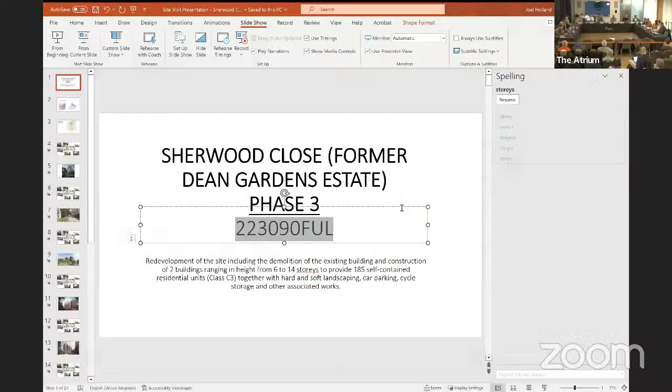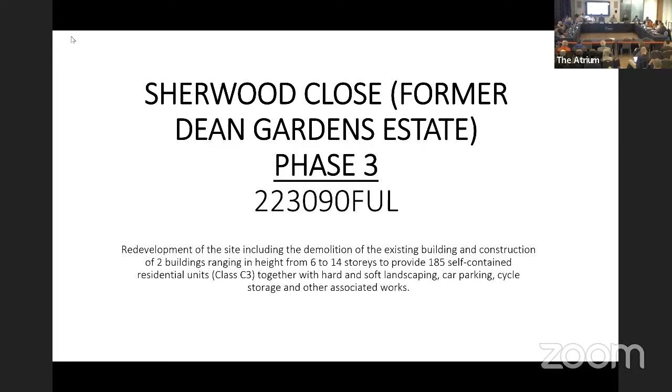Good evening, members. Item number 2 on the agenda this evening is an application for full planning permission pertaining to phase 3 of the Dean Gardens Estate redevelopment. The originally consented redevelopment of the estate consisted of 3 phases, with all affordable housing to be part of phases 1 and 2, with phase 3 to be entirely private market sale.

The proposal would increase the number of units within the development, with the majority of the uplift being to provide additional affordable housing. The proposal would therefore deliver additional affordable housing within the estate in a phase when none was previously to be delivered. The previous consent also proposed phase 3 to have heights between 7 and 9 storeys.

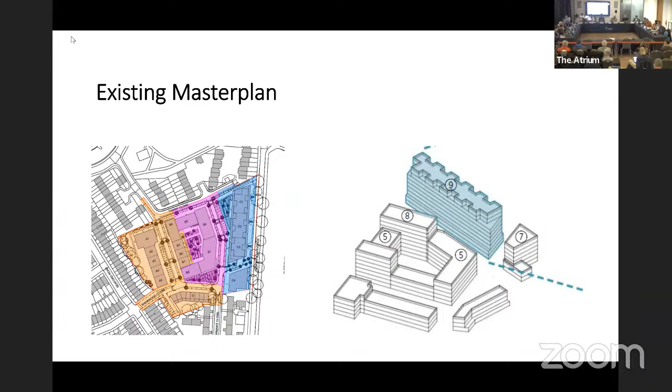The proposed development involves 3 separate cores as opposed to the original 4, with the proposed C1 building being separated from the proposed C2, C3 building. The separation of the development into two separate masses increases permeability into the site and breaks up the massing of the proposed development.

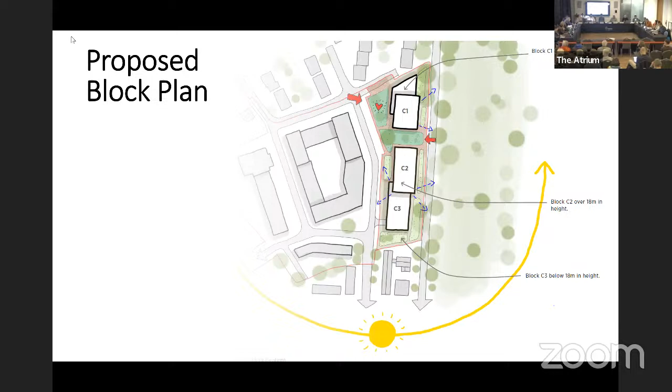The northern edge of Block 1 would retain a consented height of 9 storeys at its corner, but would rise to 14 storeys as the building progresses south. Focusing the proposed additional height away from the boundary with residential properties to the north is an acceptable solution, reducing amenity impacts on neighbouring properties.

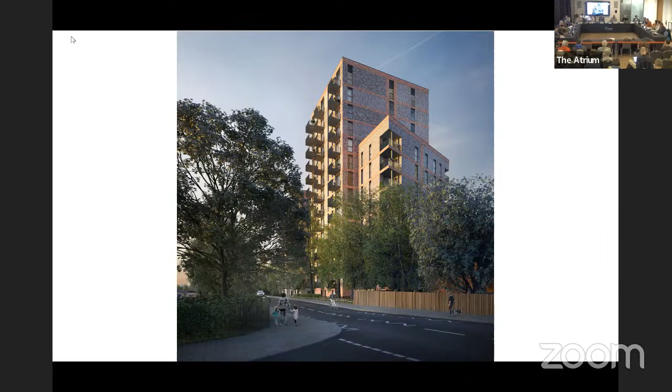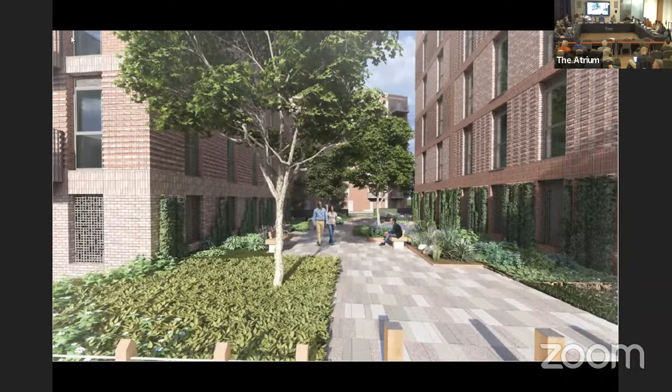The height differential provides more visual relief and architectural interest than the approved scheme, which consisted of an elongated block at a generally consistent height. Locating the height more away from the northern edge of the site also aids in offering a more sympathetic transition in the built form of the townscape along Northfield Avenue. The scheme also proposes staggered building lines to increase visual variation and articulation within its design.

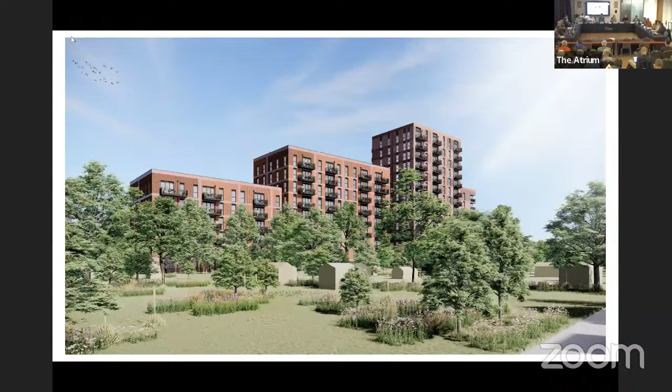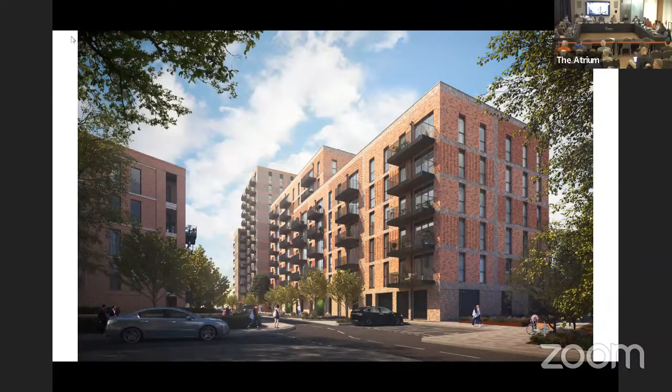The facade of the proposed development follows a conventional grid-like pattern. However, visual interest is embedded in the architectural approach, including different patterns of brick within the facade, incorporating projecting elements alternating with flat and level brickwork. The pattern alternates consistently within each block, though the two separate blocks contain different patterns of projecting and flat elements. Both blocks are connected architecturally through the use of red and grey-purple tones. The darker tones of the metal balconies provide a successful contrast to the brickwork.

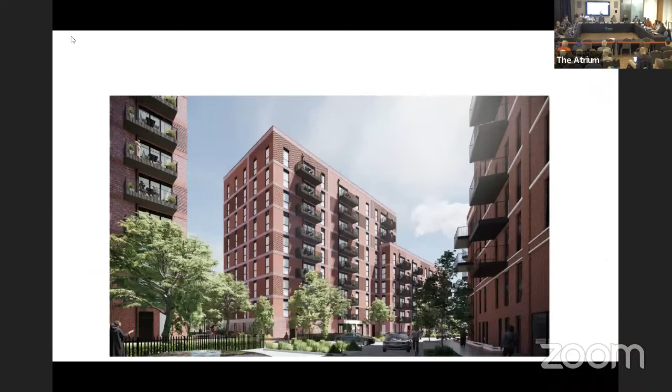Here's just some more images of the development. Site levels will be rationalized through the site to provide a gentle slope in the cross-block links, improving pedestrian accessibility between Northfield Avenue and phases 1 and 2 of the existing development.

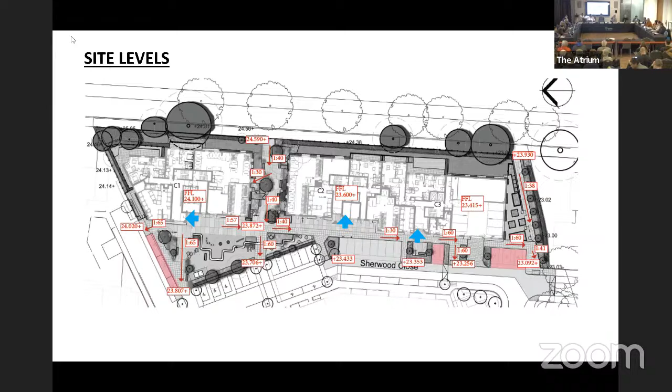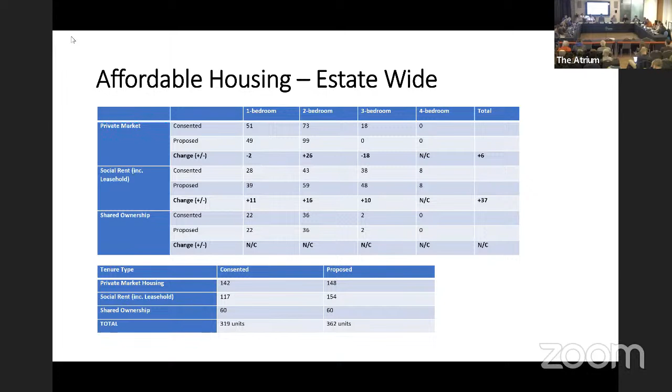On an estate-wide basis, phases 1, 2, and proposed phase 3 would deliver 62% affordable housing across the development. This scheme itself would deliver an additional 37 social rent homes, which is a particularly good outcome, given the consented scheme for phase 3 was to be all private market sale. As required by policy H8 of the London Plan, the scheme was subject to a viability tested route, with the conclusion of the independent assessor being that the scheme is delivering the maximum amount of affordable housing provision.

The affordable housing would be located in Block C3, and there is a good mix of social rent typologies within the scheme.

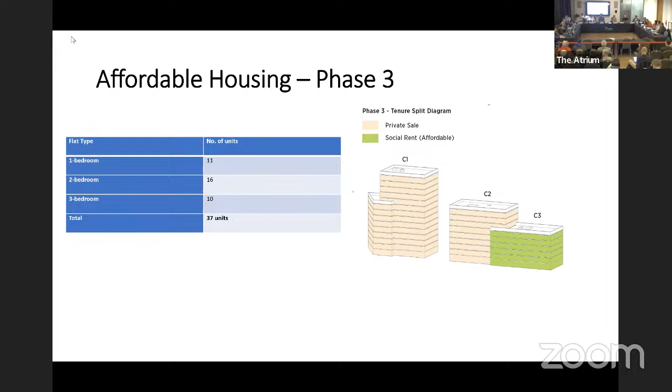Landscaping and children's play space have been well considered, including the implementation of 2 cross-block links to Northfield Avenue. The cross-block link to the south would be a community growing garden. All open space and play areas will be accessible to all regardless of tenure.

And this is an image of the proposed children's play space area.

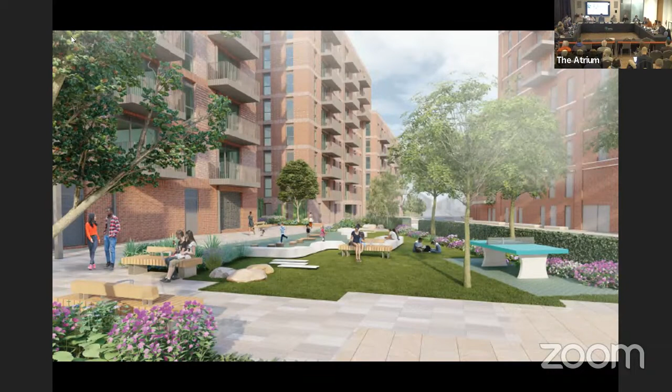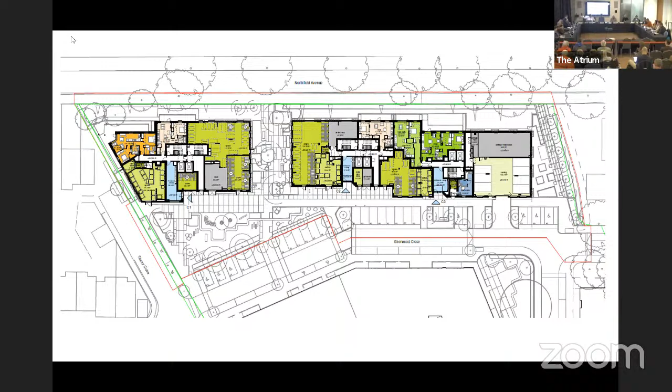Members may note that the scheme was due to be considered at the Planning Committee in January 2023. However, the scheme was withdrawn from the committee in response to a statement from the GLA in late December requiring all buildings over 30 metres to accommodate a second staircase. This matter proved insurmountable for Block C1 to be resolved prior to that particular planning committee, resulting in its withdrawal.

In addition, since this time, the Secretary of State for Levelling Up Housing and Communities advised that a second staircase requirement would apply to buildings above 18 metres on the 24th of July this year. Therefore, Block C2 was also affected by such a change in fire safety regulations and was amended accordingly.

The scheme has been revised to accommodate the second staircase, as you can see in these 2 images, in the orange buildings, for both Block C1 and C2, and that forms part of the consideration for this application.

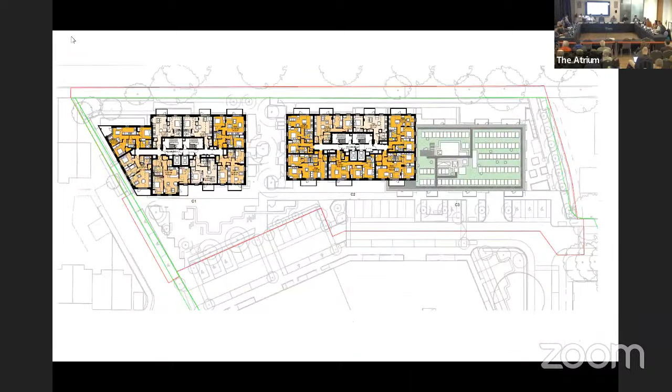The officer recommendation for this application is to approve, subject to conditions, Section 106 agreement, and Stage 2 referral to the GLA. Thank you, Chair.

Just prior to the meeting, we did receive an additional objection from a resident of Tawny Close raising the issues of dust, noise and daylight. However, those matters are already addressed in the officer report.

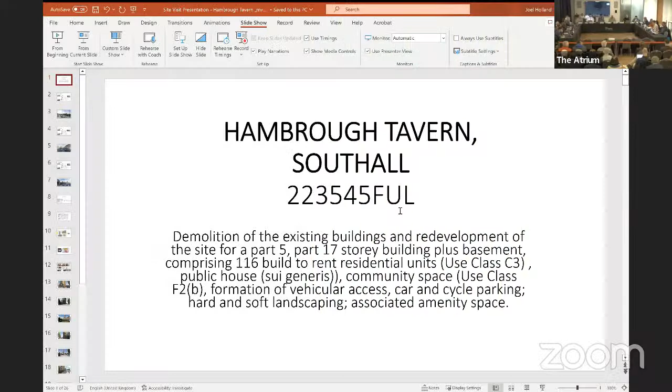Thank you very much. We will now go back to your agenda order, which is number 1, which is the former Hambrough Tavern. That's you again, Joel, isn't it?

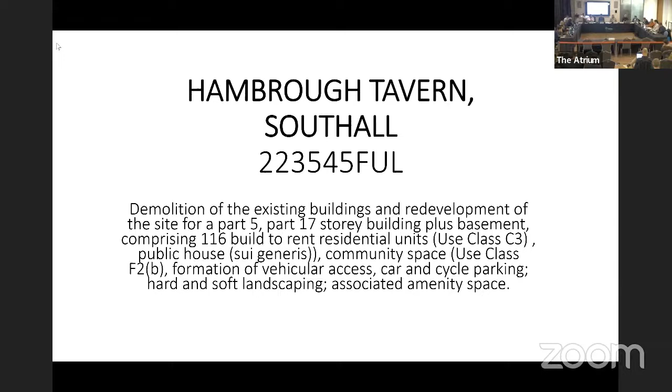Item number 1 on your agenda this evening is an application for the demolition of existing buildings at Hambrough Tavern and construction of a building comprising part 5, part 17 stories. The reprovision of the public house is proposed at ground floor level, along with co-working space, gym and community space. The scheme would deliver 116 build-to-rent residential homes with associated amenity space areas.

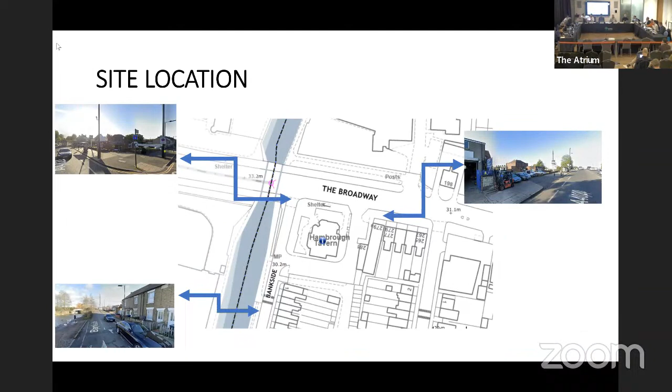The existing buildings on site comprise the main public house building and a 3-story building in the southeastern corner. The site itself has negligible engagement with the street or adjacent canal and has no real architectural merit. To the south of the site on Bankside, the typical housing is 2-story terrace homes. The site is located at the edge of the borough and acts as a gateway site, acting as an entrance point along Uxbridge Road from the London Borough of Hillingdon. Those of you on the site visit would have seen these images.

Build-to-rent schemes are different in nature to conventional residential homes, which are supported in principle by policy H11 of the London Plan. This is a type of housing product that will deliver housing for local residents, providing more secure and longer tenancies than the private rental sector. There will be less of the whim to market forces, particularly as rents are only able to be increased based on an established formula.

Policy compliant affordable housing by habitable room would be delivered in the form of discount market rent. A good mix of housing options are to be provided, with the largest discount being at 65% of open market rent, and this constitutes 27 of the 35 affordable homes being delivered. 8 3-bedroom homes would also be provided within discount market rent set at London living rent levels.

The existing consent, which remains valid, has an approved 15-story hotel scheme. Whilst the hotel consent was secured, there's been a lack of demand in finding a hotel operator to administer the hotel use, and that's made it an unviable market proposition.

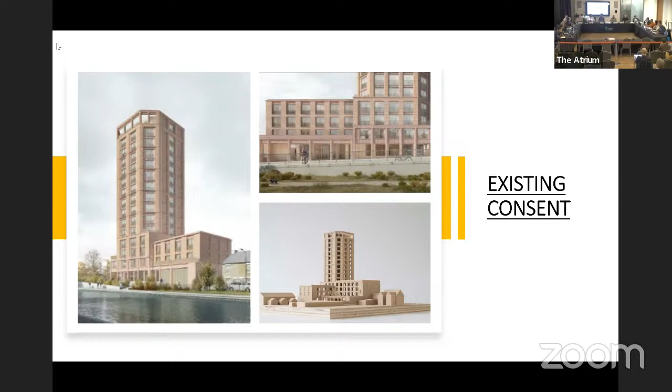This has resulted in necessary changes to height, scale and massing of the approved scheme to deliver an alternative use of housing on the site, to account for additional requirements for increased floor to ceiling heights, minimum floor space sizes, and communal and private amenity provision. The ground floor uses would better engage with the street in comparison to the consented scheme.

The public house will be re-provided on the site, as well as a new community use space that will be accessed from Bankside and available to all residents. Residents would also have access to a co-working space and gym within the development, providing additional amenity.

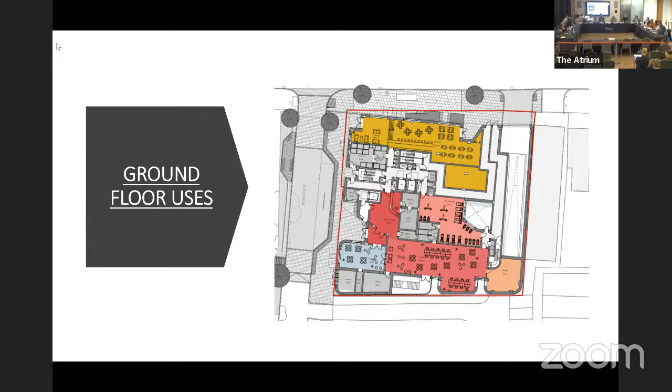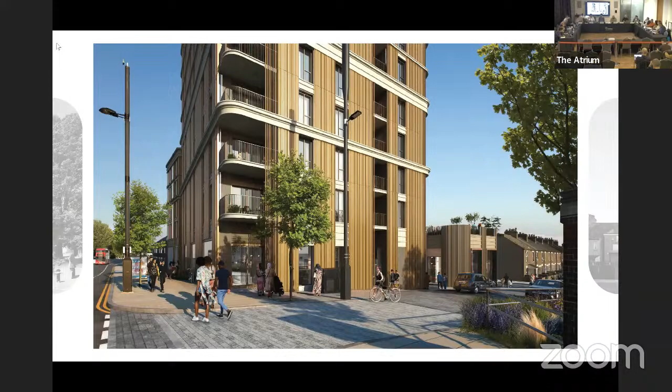The overall design scale, massing and height of the proposed development has been considered at length between council officers and the developer through the pre-application discussions. The scheme was also reviewed by council's design review panel and community review panel.

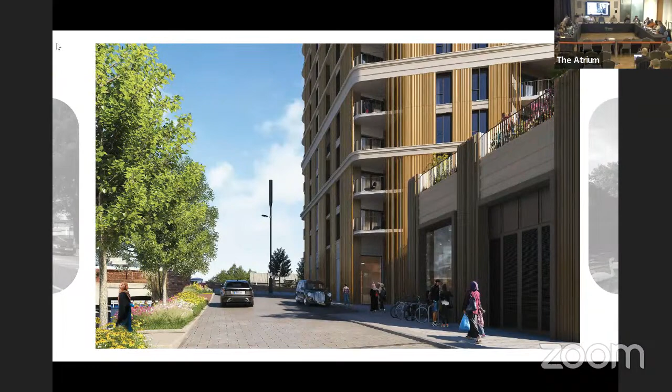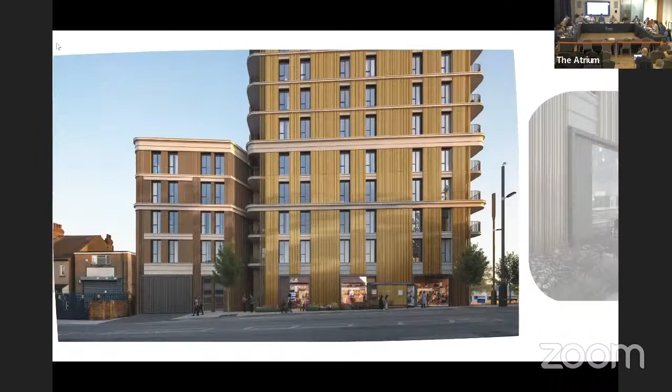The scheme would deliver an interesting facade design with the use of ceramic paneling made of glazed terracotta, playing a prominent role in the facade. The use of this material provides a reference point to the Martin brothers, who are prolific members of Southall's heritage and worked in pottery and ceramics.

The colour scheme of both the main building and the shoulder elements reflect prominent tones that the Martin brothers used. The scheme also uses strong horizontal lines that are reflective of the prevailing built form, particularly mixed-use buildings along the Broadway. Thicker horizontal banding within the facade also aids in defining a base, a middle, and a crown to the building that gives the building visual interest.

The building takes an elegant form through the vertical pattern of fenestration, providing coherency in its design. Curved edges and chamfering of external walls of the building provide an interesting feature also that reduce impacts on neighbouring properties.

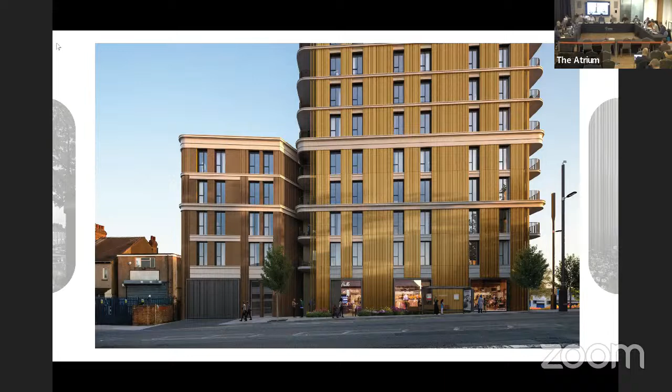A full townscape visual impact assessment and heritage assessment has been carried out over the site, and has considered that visual impacts within short, medium, and long-range views would be acceptable.

The GLA have noted within their stage one response that the built form of the proposed development does not represent a significant departure from the 15-storey hotel.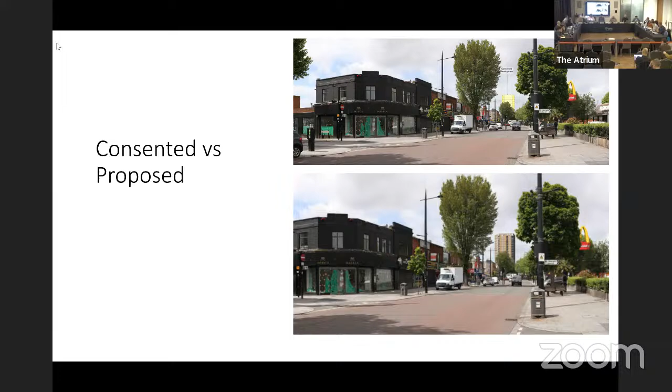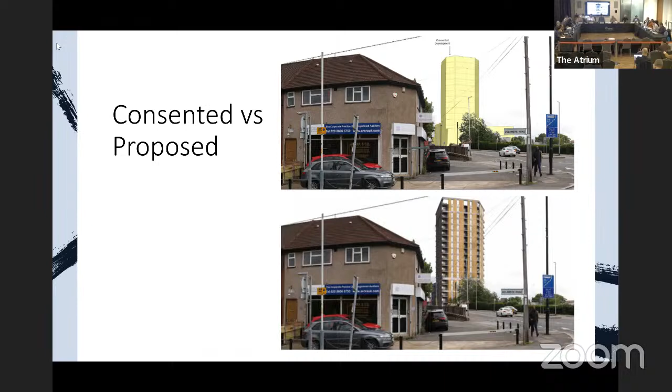The assessment also focused on the impacts that the proposal would have on heritage, which includes the nearby canal. This forms part of the canal side conservation area. It is considered, when assessing development's impact on designated heritage assets, that the proposal constitutes less than substantial harm in accordance with the NPPF tests, with the public benefits of the proposal significantly outweighing any harm caused.

A full assessment on the impacts on nearby residents has been undertaken, particularly with respect to daylight, sunlight, overlooking, and overshadowing. With respect to daylight and sunlight, the development achieves a high level of compliance with BRE guidance, protecting the living conditions of neighbouring residents.

Full compliance with impacts on rear gardens has been achieved. The design of the building, particularly the chamfered edge, directs the eyes to non-habitable spaces on adjoining sites, and it uses vertical fins to prevent overlooking on balconies.

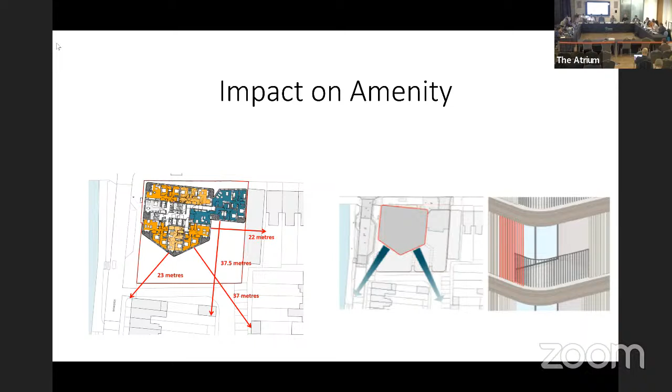As a majority of the residential properties are located to the south of the application site, the proposed development would have a minimal impact on overshadowing.

The applicant also provided a VU.CITY model, which enabled us to get down into the gardens and the rear of these properties on Bankside and Beresford Avenue to look at the visual impact that these properties would have. These are shown on your screen also.

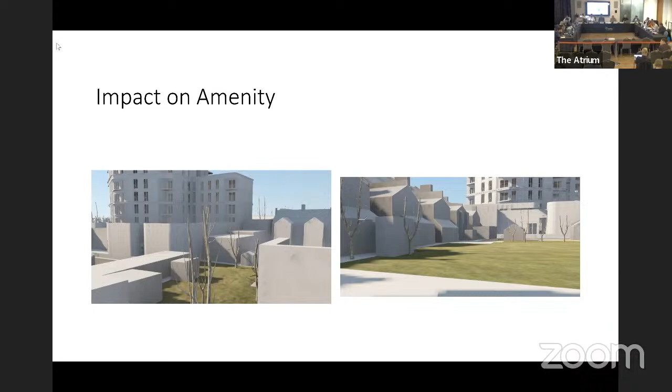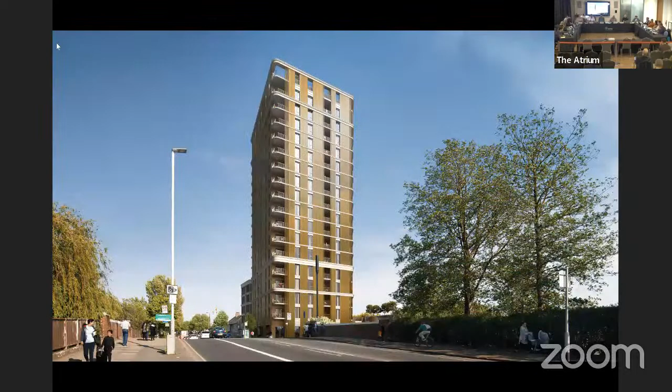Overall, the proposal represents a high-quality scheme that would deliver positive design interventions into the public realm and would deliver a different form of housing product in a highly connected location. It is the officer recommendation that the application be approved, subject to conditions, legal agreement, and stage 2 referral to the GLA. I'll refer members also to the briefing note that has been circulated.

Is there anything in that briefing note you really want to highlight, Joel? Not particularly, no. Okay, right, okay, right, throw it open for...

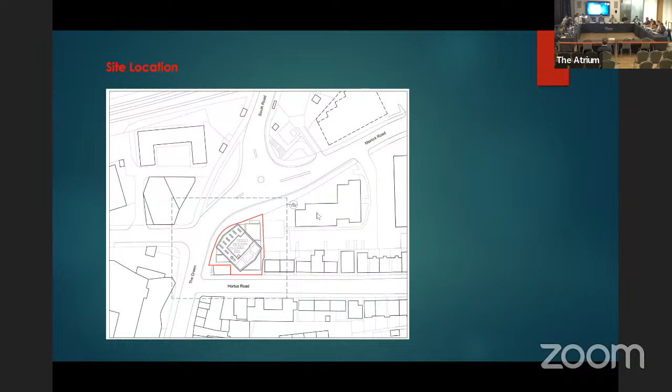This is a small site in the Southall Opportunity Area, where there has been major development in recent years with permissions for large residential-led schemes and high buildings of up to 23 stories, such as the Arches, King's House, and the Margarita site. This slide shows the context with these other approved or existing high buildings beside it, so it fits into that cluster.

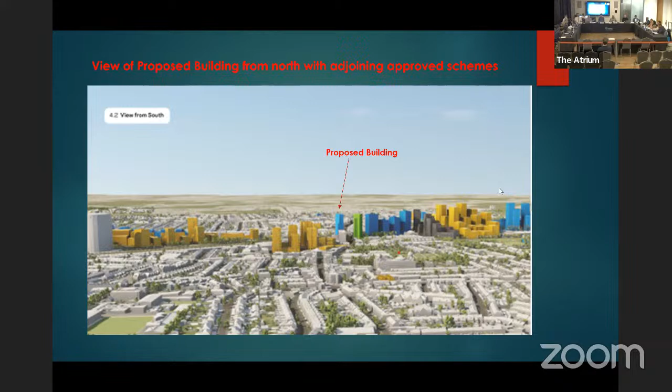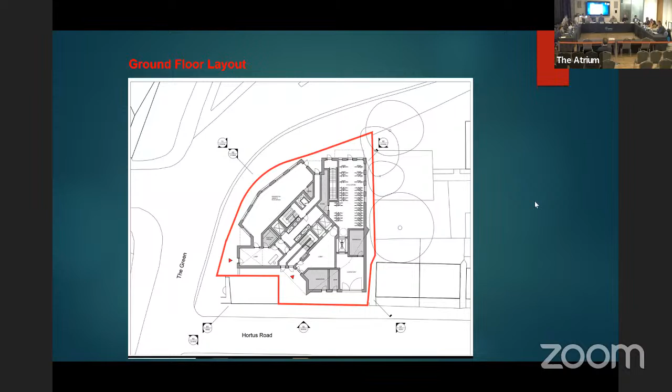The scheme would provide 95 flats in a Part 23, Part 19, and Part 14 story building with a flexible community amenity space at ground floor level. It's car-free with 180 cycle parking spaces. Almost 20% of the site would be a public realm area, providing widened pavements, green planting areas with new trees, benches and integrated street lighting to improve the public area between the scheme and the raised highway. New landscaping is proposed on both the Green and Hortus Road frontages, and the existing retaining wall to the Green would be kept to provide a buffer to traffic and associated noise.

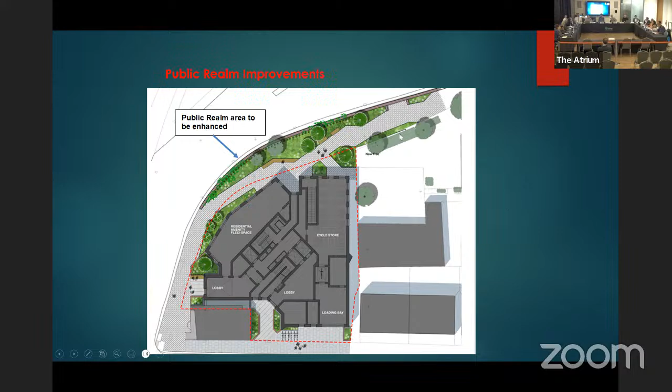It would make an important contribution to meeting local housing needs, and 35% of units, or 33 flats, would be affordable. Now, the proposed tenure split of 70% intermediate and 30% London affordable rent doesn't meet the council's preferred tenure mix. However, as before, an independent viability appraisal concluded that the scheme could not viably support more affordable housing or a different tenure mix. I'd point out the affordable units and tenure mix are unchanged from the previously approved scheme.

As before, all flats would exceed minimum size standards and all would be dual aspect, with adequate private balconies. Communal amenity spaces on the first and 14th floors would include children's play space. Given it's a small site, there would still be an overall shortage of amenity space, but this would be mitigated by a contribution towards improved provision in Southall Manor House grounds.

There wouldn't be any significant impacts on the amenity of adjoining occupiers due to the orientation of the building and separation distances from nearby dwellings.

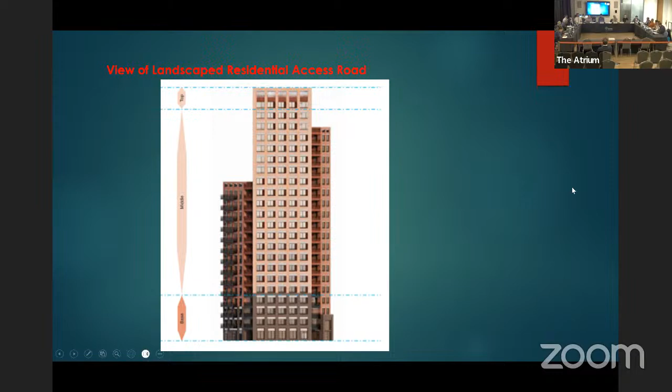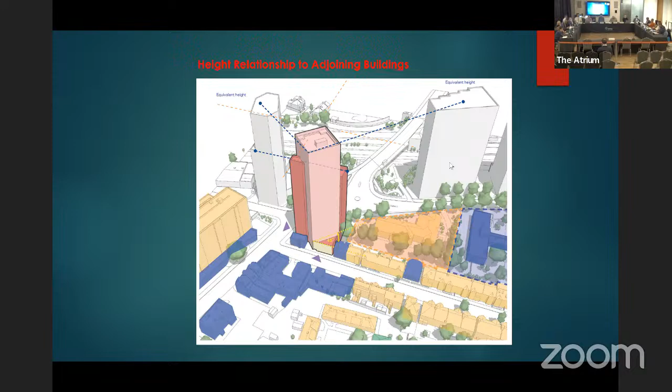The scheme has been assessed against London Plan design criteria and the Ealing Housing design guidance and will largely accord with these. This reflects that the architectural quality is of a high standard, it wouldn't harm long views, and the height would not be out of keeping with the existing townscape of tall buildings. It would have a well-defined top, middle, and base, and active street frontage on both sides. The slide indicates roughly what the street level frontage would look like.

The main design change from the approved scheme is an increased size of core area to accommodate an additional staircase and lift. This results in changes to the northwest and southeast elevations of the taller block in the form of a slight bulge, as this slide shows, on both these elevations. On the Hortus Road elevation, the scale of the building would be reduced to transition to the existing two-story houses there.

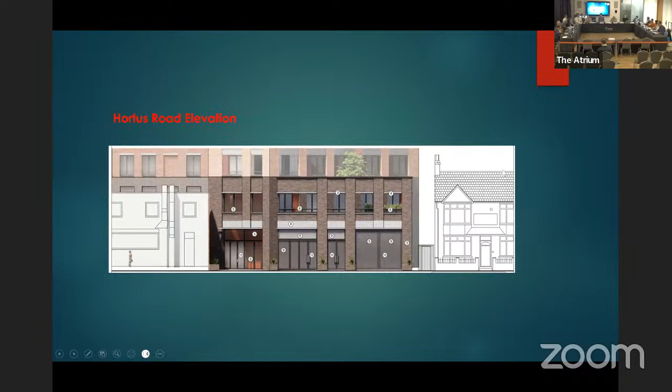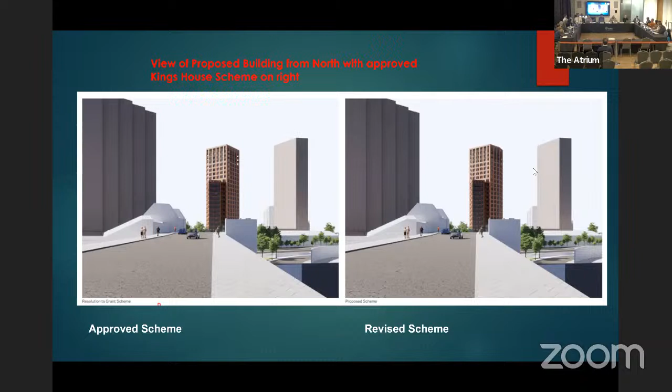So on balance, while this is a high prominent building, it's considered to fit reasonably well into the townscape for part of Southall, already containing other tall buildings, complementing these and providing a well-designed landmark feature beside the new railway station. With King's House and Merrick Place, it would mark the gateway into the opportunity area and improve the legibility of this part of Southall. This slide shows what it would look like coming from the north in the context of other approved schemes.

This is a car-free development. Transport Services and TfL have both assessed its potential implications for the highway network and consider it acceptable, subject to review of existing CPZs, various transport infrastructure measures, and bus service improvements. Section 106 contributions have been agreed for these. The site's highly accessible by public transport, and with a restriction on car parking permits and car club memberships for scheme residents, potential traffic impacts would be adequately mitigated.

So overall, the scheme will provide a number of planning and regeneration benefits, including a sizable increase in the housing stock, 33 affordable units, greatly improved public realm area, enhanced appearance of a prominent site beside the new Elizabeth Line station, and a gateway to Southall Town Centre, as well as provision of flexible community meeting space available to the local community, and in the order of £1.2 million in Section 106 and CIL contributions. These will go towards infrastructure, community facilities, and open space improvements in the area.

These benefits are considered to outweigh the scheme's quite limited deficiencies, and the revisions don't change any of that. So it's recommended for approval subject to legal agreements and referral to the GLA.

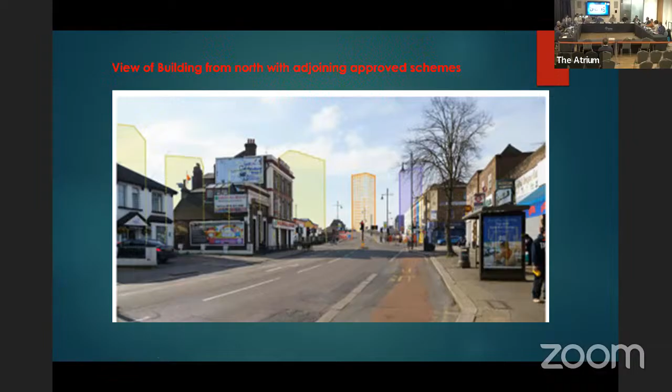My question relates to that briefing note explanation of the fire safety issues, and I didn't understand it very well. It seems to be saying that because there are 2 evacuation lifts, we aren't concerned about the containment of the lobbies. Not quite sure how that works. Are we saying all residents can get to either lobby, and that's why only one of them's likely to be affected? Maybe something that shows us where the lifts are in relation to the floors might help.

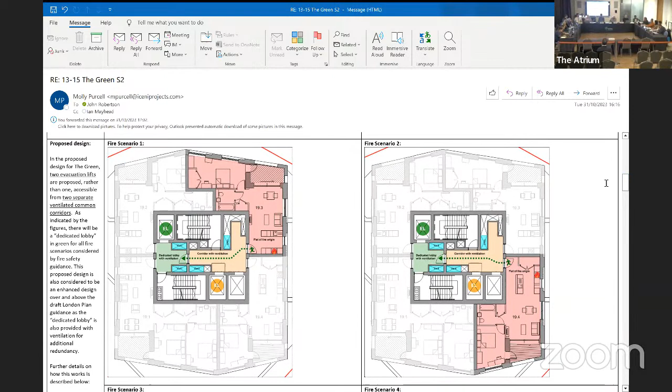Coming on to the fire safety issue, I think the point was that there needs to be a safe corridor or dedicated lobby with ventilation, separate from the flats. What the applicants have told us, I don't know if you can see on the screen, is that there is a dedicated lobby with ventilation here, and a corridor with ventilation. These are separated by a fire door, so no smoke can get through. So if there was a fire in this flat, the resident could go through here into the safe lobby, which would have no smoke, and get to the lifts there, and vice versa.

And the applicants have given us diagrams to consider all potential scenarios, and it seems to work for all of them, so I think we're satisfied that it does meet the London Plan requirements. And as I said, HSE are already satisfied with it. It will be checked by the GLA again. And of course, it's all got to meet the building regulations as well for fire safety. So for all these reasons, we're satisfied that it is okay.

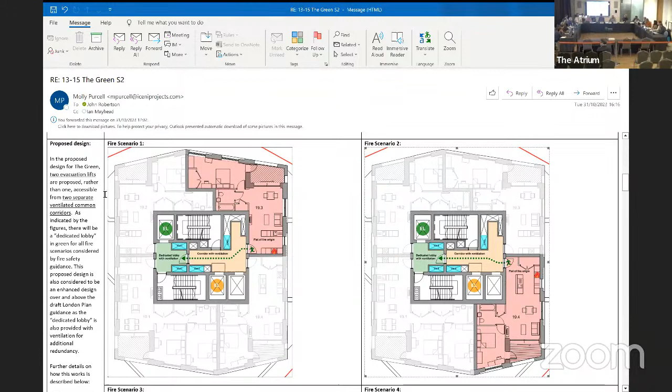Right, following that, I think you indicated.

Thank you. It was just about the outside area, in terms of the concrete wall that's there, that's going to remain as part of the buffer. I noticed when we were there on Saturday, it's not a very pleasant place to stand between the concrete wall and where the building starts. I know there's going to be some work and additional lighting, CCTV. I just wonder whether any consideration was made to actually remove that. I know it's there to buffer the noise, but whether that could have been done with foliage or bushes or trees or something else, to make it a bit more pleasant and potentially a bit safer in terms of walking down there, allowing more light etc into that area. It was just something I thought about after we were there on Saturday.

When you say the wall, do you mean the retaining wall for the road, or do you mean that concrete bit that goes round between? If you can get the picture back up, sorry. I'll just get the picture back up. Yeah, it's gone to you. Then we'll just be sure which one you're talking about. It's the public realm one, John, I think.

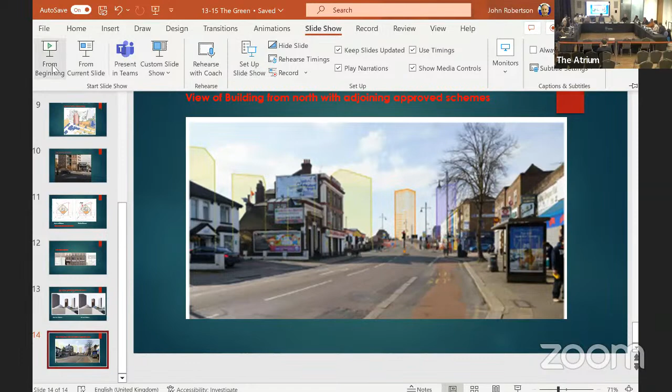That one, hold it there. Whether that could be replaced with - yes, exactly - because you're essentially in a ditch, and I think that obviously blocks light, you can't see out. I understand what you mentioned about blocking traffic noise etc, but could that not be replaced with bushes or trees or something else to make it better? That's a retaining wall for the road, isn't it? The road is on top of that. Oh, the road's on top. Oh yeah, that's the road. Oh, so that's at road level. That's the road, there. Oh, I thought the road was okay, but I'll take back that question. I thought the road was at a lower level, and that was in between. Is that what you were talking about? Okay.

Sorry, Councillor Shaw.

Yeah, thanks Chair. A couple of questions I had have been asked, but one that remains a query is on the amenity space. I appreciate this is a very, very small site, and the report does note that the urban greening factor is well below London Plan and wouldn't usually be acceptable. Now, I was a little confused around access to the communal outdoor amenity space on the 1st and 14th floors, and just how residents would be accessing that. There also seems to be on the plans, on the ground floor, a communal flexible amenity space. And whether that was indeed the one from the 1st floor that's marked on the ground floor, or whether that's something additional.

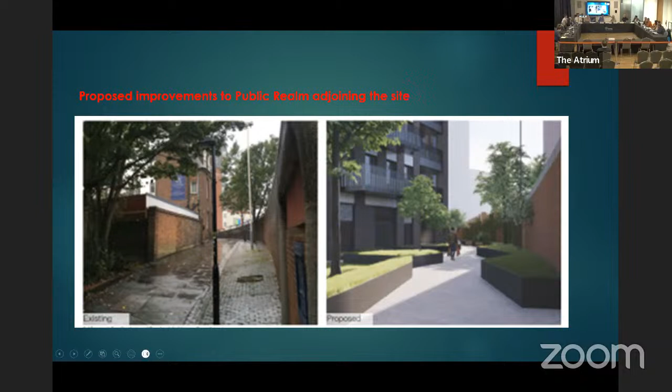I'm not sure, that looks like our lights to me. Let me just look. Not this one nearest to me, but one further - that looks like one of Ealing's lampposts to me.

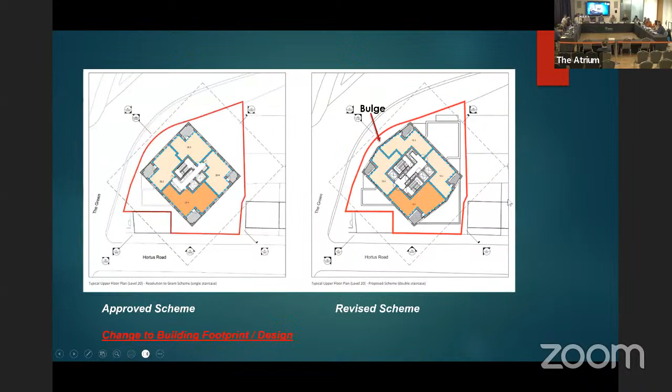I'm just worried that we are able to maintain it amicably going forward. That's all. Whether it's ours or theirs, I'm not that fussed.

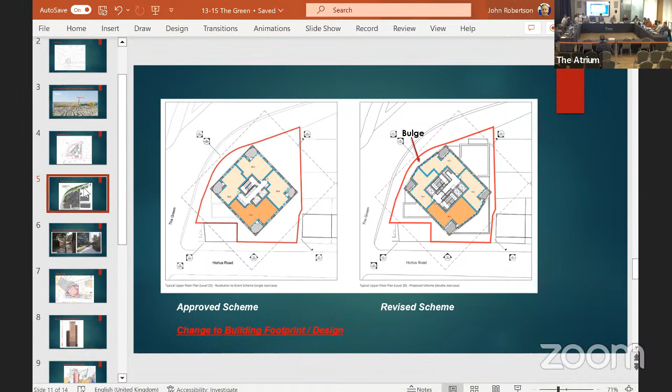I would suggest that part of that image with the planters close to the buildings, they're within the application site, and the ones nearest to the retaining wall are outside the application site. So obviously we would have to look at the maintenance arrangements. I think we need to lock the maintenance arrangements into conditions or whatever.

I'm not particularly worried who actually owns it. I'm more worried that if we don't fix it, it doesn't get missed. Yeah, the red line, sorry, the red line's the application site boundary.

Yes, there is, and the applicant is willing to maintain that. And the second question, following on from Councillor Consi's question - although we can't knock that wall down, could we do something with that wall? It looks very nice on the picture, but it didn't look very nice on site. I just wondered, is there green walls or something that we thought about when we were looking at public space there?

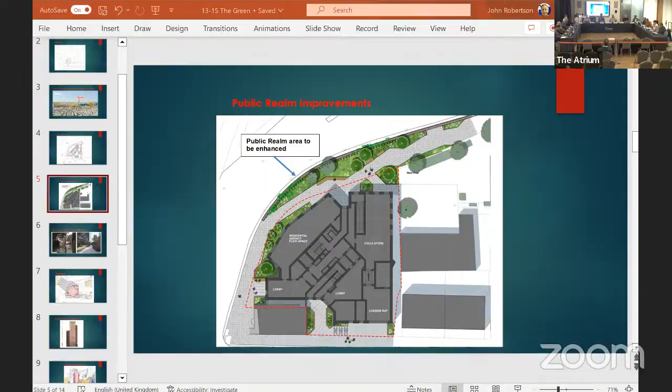I mean, it's a good application. I'm minded to grant it, but the whole thing seemed quite risible because of that elephantine building next door to it that clearly should be, if anyone was developing the site, they would include that. So I'm minded to grant this, but my prediction is we'll be here listening to a further application down the line that may include number 19, the green.

Don't let Councillor Kelly cloud your minds about future applications. We are only dealing with what's in front of us tonight, just to make sure. I know you can have your say, but I'm just trying to make sure that the committee know that they are dealing with what's in front of them, nothing else, neither behind them nor in front of them. Tonight is what it counts.

Okay, Councillor Shaw. Yeah, thanks, Chair. I think overall this does regenerate an area. It is a returning application, similar to the others we've seen tonight that has existing planning with it. I think that this does improve the area well and provide much needed housing in the area, so I'm minded to approve this.